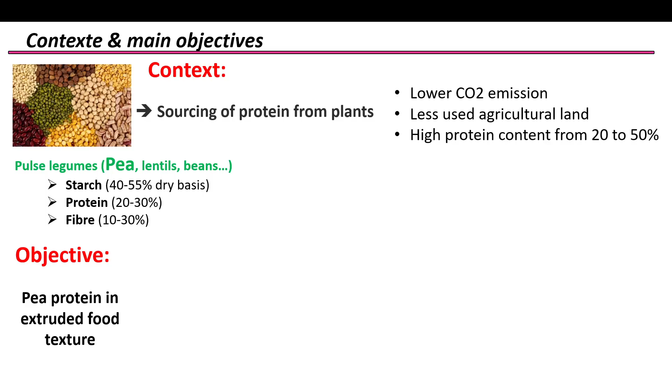So the talk today is about modeling of mechanical behavior of pea snacks. Before going any further, let me give you some elements of the context of the study. So the idea is to find different sourcing of the protein from plants, which offer different aspects like the lower CO2 emission, less used agricultural land, and high protein content. The subject of Iman's thesis focused more on pea protein, and the idea was to find out more about the effect of this protein on the extruded food texture.

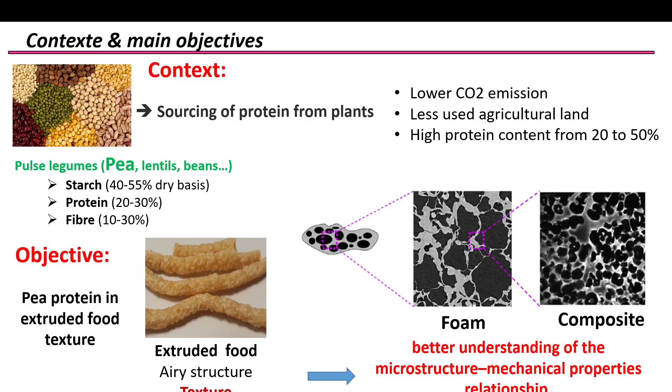So speaking about the extruded food texture, this brings out the effect of the cellular structure, which also depends on the cell wall properties. In the case of the pea composite material, the idea was to better understand the link between the microstructure of the cell wall and the mechanical behavior at the solid phase, which also will affect the properties of the foam structure as well.

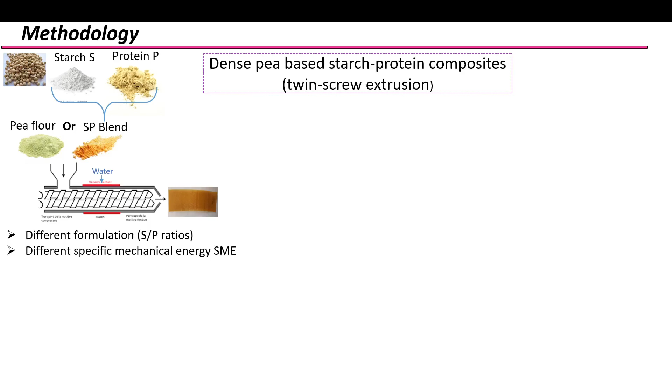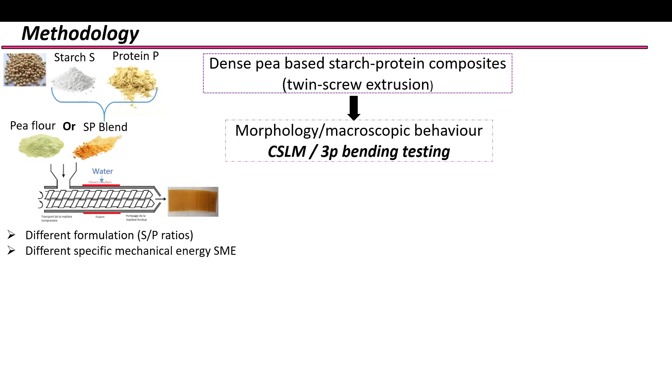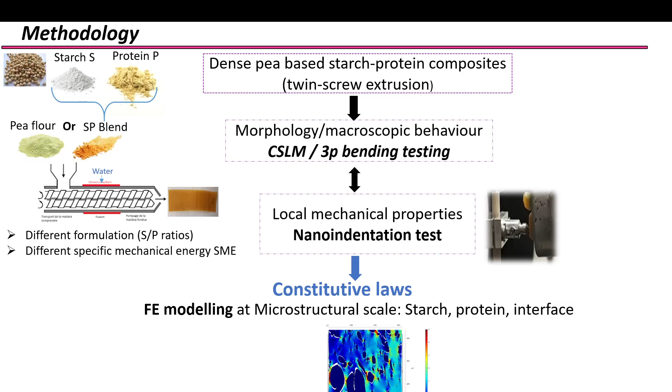So the idea was to design some pea-based starch protein composites using twin screw extrusion, using different formulations and different specific mechanical energies. We did also some morphology and macroscopic behavior determination using CLSM and 3-point bending testing, and also some local mechanical property determination using nano-indentation test, and combined all these experimental data towards predicting the behavior of the pea protein composite material using finite element computation, both at the macroscopic and the microscopic scale.

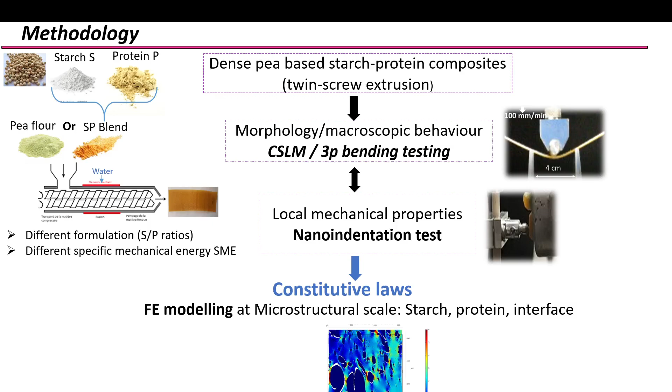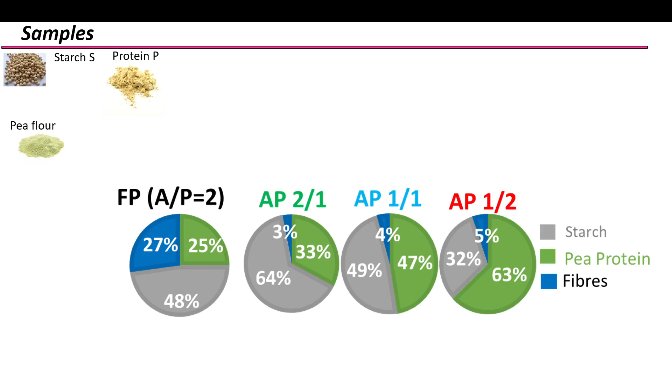Today I'm going more to talk about how the finite element computations were used to determine the macroscopic behavior, but we will talk a bit about the determination of the local properties using nano-indentation at the end of the presentation. So these are the samples that were used in the study. These range from the pea flour to starch pea protein composites with different pea protein contents ranging from 30% up to 60%.

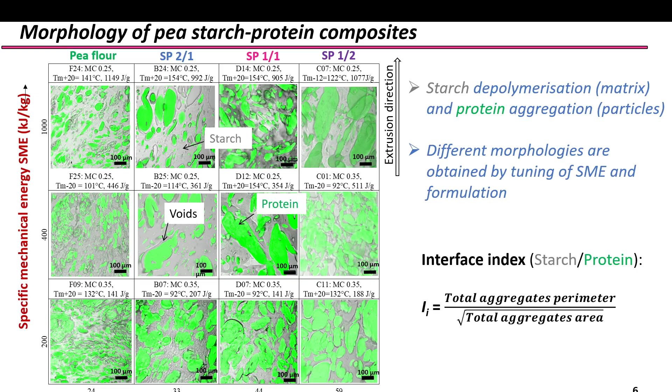In order to further quantify the effect of the process parameters on the morphology of the protein aggregates, we use an index called the interface index. This index is just the ratio between the total aggregate perimeter over the square root of the total aggregate area. So we related this index to the macroscopic mechanical behavior of the pea composite. So here's the flexural modulus, for instance, as a function of the interface index, where we see a more or less nonlinear behavior where the flexural modulus increases with the increase of the interface index.

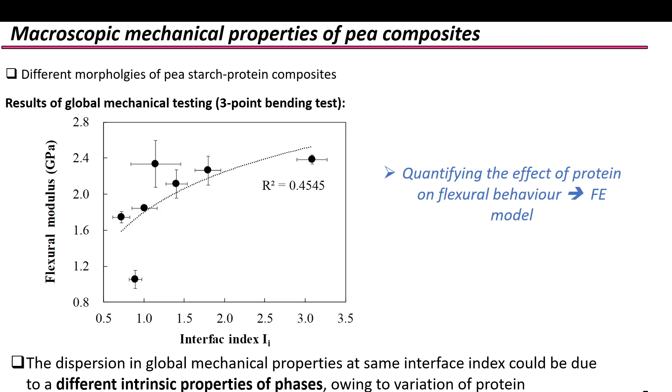So there's also some more or less dispersion in the global mechanical behaviors at the same interface index, which can be related to the variability of the intrinsic properties of the phases, but also to the degree of transformation at SME level. So in order to further quantify the effect of the protein on the flexural behavior, we use the finite element computation at the macroscopic scale.

So this is a kind of sketch of the scheme of the FE simulation. We use an isotropic elastic model for which you need only Young's modulus and Poisson coefficients for the phases, but also in order to account for the plasticity of the composites, we use the Voce law, which is only determined by three main parameters: the yield stress, the saturation stress, and the saturation exponent.

So the behavior of this law is sketched on the right part. So this is the parameter window that we used for simulations for both Young's modulus, but also the three other parameters related to the plasticity behavior. And here is the predicted behavior of all samples, including the composites, the flour, and the starch phase as well, where we could see that we achieve a pretty good agreement between the experimental and the numerical behavior.

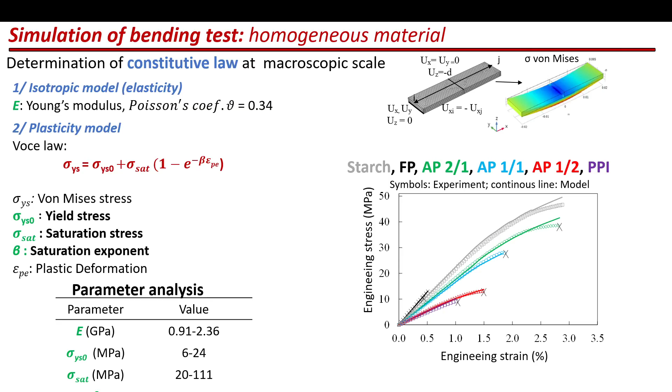In order to quantify further these effects, we sketch here the Young's modulus dependence on the interface index, and surprisingly, we see that there is a linear increase of the stiffness with the increase of the interface index, which appears to be surprising because we would think that the lower properties at the interface would trigger a lower behavior, but in this case we see the opposite behavior.

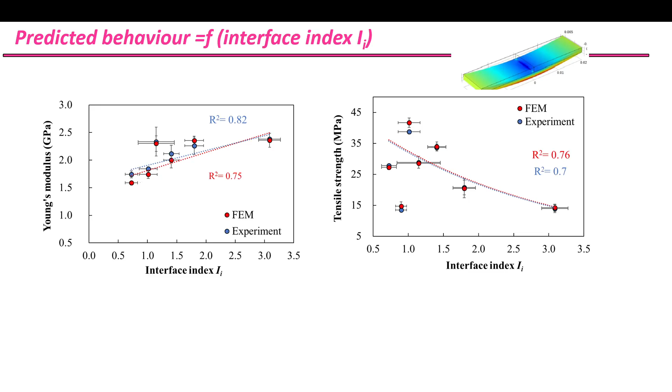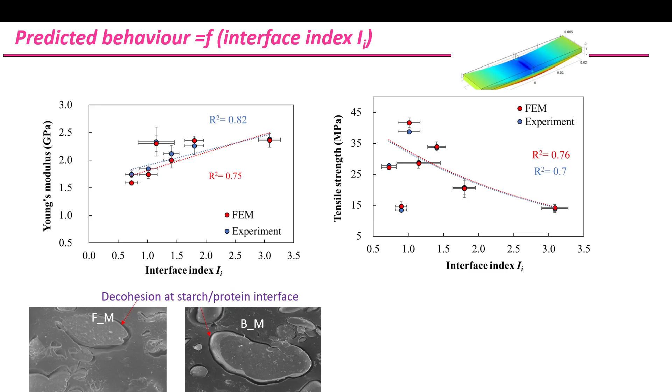If you look at the tensile strength as a function of the interface index, we see more negative correlations, which could be also explained by the fact that you have a weak link between the two phases. The examination of the SEM fractography shows clearly the decohesion between the starch and the protein, and the explanations of the two curves can be sketched as follows. So the alteration of the load transfer at the starch-protein interface could be more related to the interfacial resistance than to the interfacial stiffness.

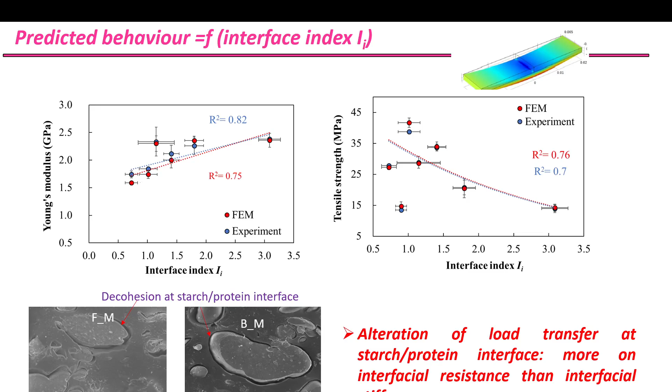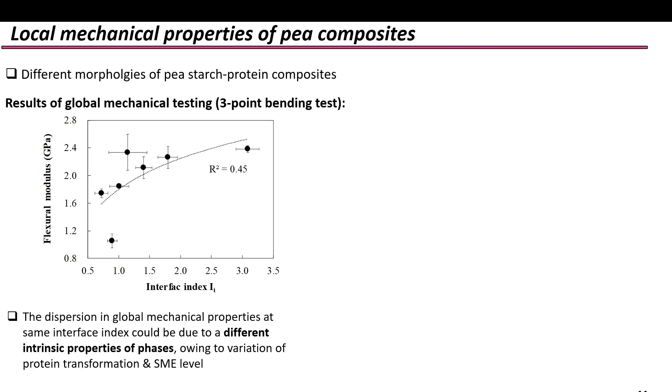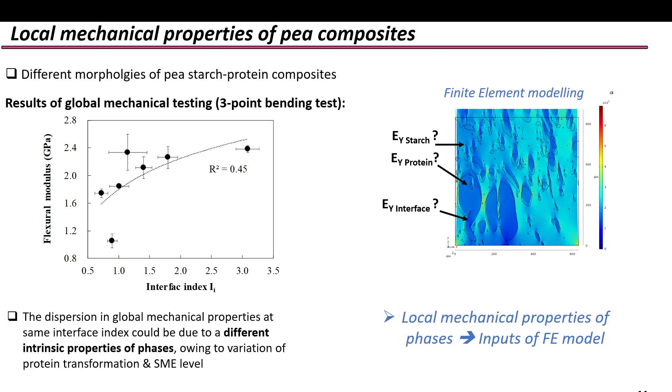So this is the main hypothesis that we used, and we wanted to verify this from the nanoindentation results. And for that, we needed more information to be able to do the micro-mechanical models that Imens tried during his thesis. So the basic idea is how to determine both the phase properties, but also how to determine the interface properties as well. For that, we used the nanoindentation experiments at Imperial College, for all the samples that have been studied previously at the macroscopic scale.

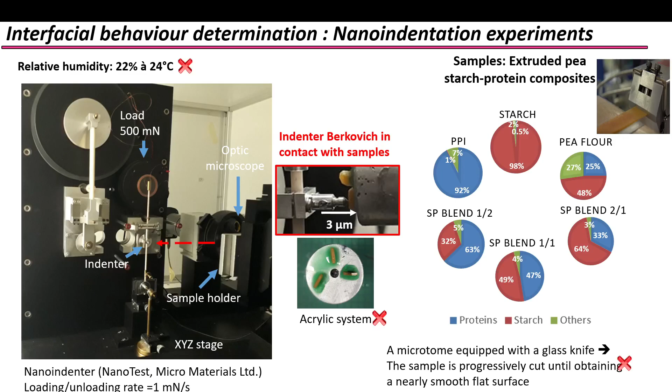And the surface finishing was a bit of a critical issue to solve because of the sensitivity of the results to the surfacing of the samples. So these are some of the grids of indents that we achieved using a Berkovich-like indenter. And we succeeded in doing a mapping through the entire composite, and it shows that depending on the depth of the penetration of the indenter, you could get quite varied results.

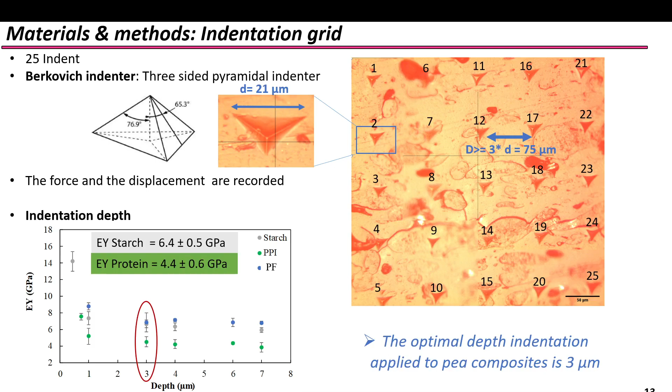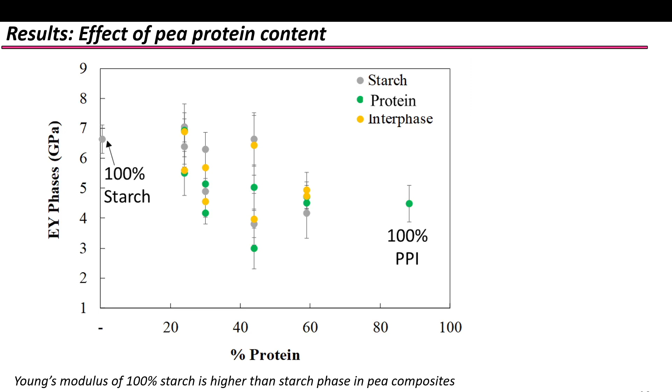So we used a large depth profiling from 1 up to 7 micrometers, and we achieve a good stability in terms of mechanical properties at a depth of 3 micrometers. One of the things that we verified is that the Young's modulus associated with the protein is lower than the modulus of the starch, as we have seen from the global tensile testing. But also, if we do some indentation at the interface between the starch and the protein, we see clearly that the hypothesis of a higher stiffness at the interface is verified and confirms the idea that the alteration of the load transfer is more related to the decrease in the interfacial resistance rather than the stiffness at the interface.

So to conclude, we have seen that various pea starch-protein composite morphologies can be triggered by using a quite interesting combination between the SME and the protein content. From the macroscopic viewpoint, the 3-point bending test reveals that we could achieve a high variability in terms of behavior, ranging from brittle to elastic-plastic behavior. We have also seen that the load transfer at the interface in these composite materials triggers more an effect on the interfacial resistance than the interfacial stiffness.

And these were confirmed by more local mechanical properties, which allow us to determine the interface Young's modulus. Those results were used in a later study to determine the exact stress distribution at the microstructural level, which Imens did in another study. And these were used as inputs for the finite element micromechanical model that I'm not talking about today.